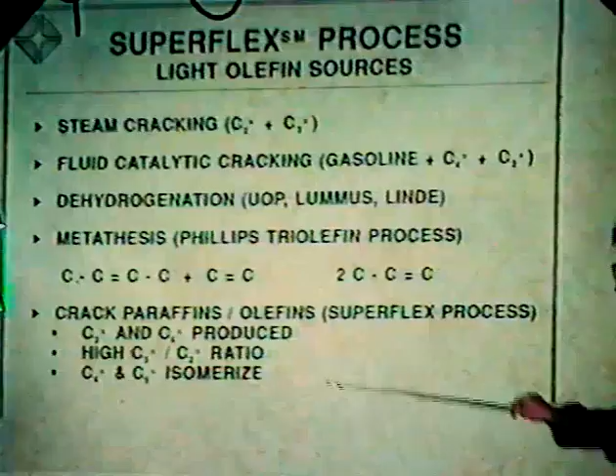What you'll be hearing about today is cracking of paraffins and olefins and mixtures thereof, which we've given the trademark Superflex. This work actually favors propylene and butylenes, and you get a very high ratio of propylene with respect to ethylene. As I mentioned earlier, you're able to skeletally isomerize the normal olefins to the branched form to make TAME and MTBE.

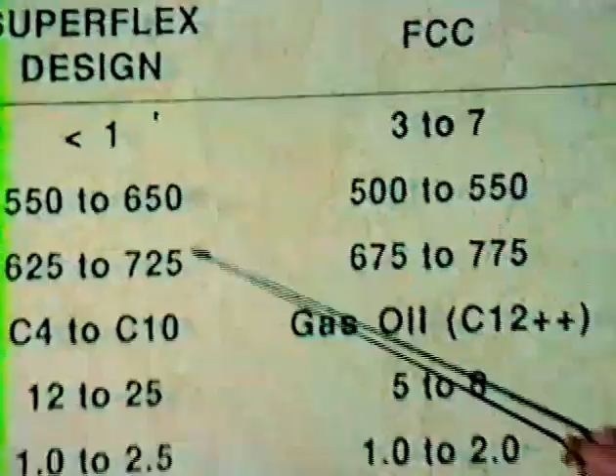From a scale-up point of view, it's simplified because it's very analogous to FCC technology, which is really to our advantage. In a comparison of Superflex versus FCC, we form very little coke, typically less than 1%. Our temperatures are a little bit higher in the riser, but regeneration temperatures are nearly equivalent.

Our feed is lighter - we're looking at C4s to C10s, whereas here generally your C12 is higher - and we're at a higher or lower cat-to-oil weight ratio. But if you do it on a mole basis, they're fairly comparable, and it has a competitive catalyst makeup rate. So things were looking fairly good from a scale-up point of view.

So what are the advantages of our technology? Well, it's an alternate route, obviously, to the light olefins. Another nice thing is you can integrate it into an olefins plant or a refinery, and that's, from an economic standpoint, the best way to do this.

Recently, Chem Systems did an economic review of the Superflex process, published in October, and they gave it very favorable ratings on an economic basis. You're able to upgrade low-value streams to light olefins, getting primarily your C3s and C4s at that high ratio I mentioned. You can get your isobutylenes and isoolefins, and the capital cost is quite low. So in order to implement this, it would be a relatively easy process in terms of putting it into a refinery or an olefins plant.

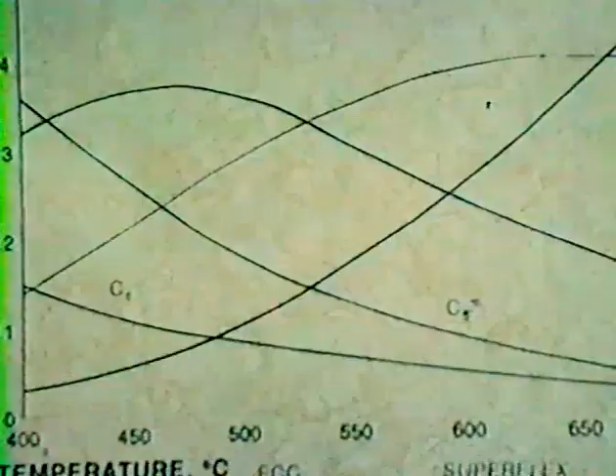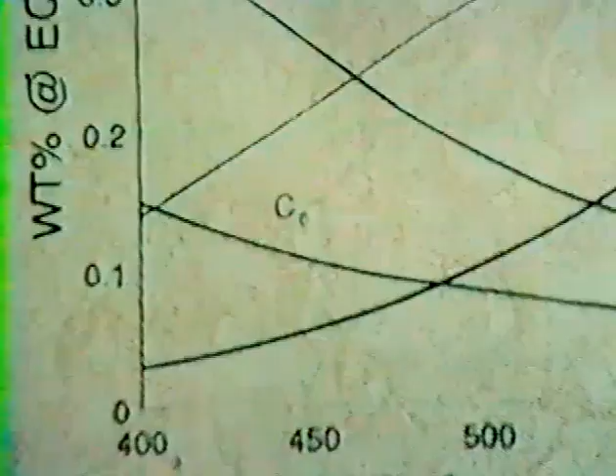As far as the thermodynamics, if you look at the olefin equilibrium for C2 to C6 with respect to temperature, steam cracking is generally around 750, favoring ethylene versus propylene. Whereas our technology operates around 600, so at equilibrium you're favoring propylene versus ethylene. Then the FCC technology we talked about earlier gives a higher product slate towards heavier materials. So it's a nice niche for us in terms of thermodynamics, taking advantage of that window to favor propylene.

As far as what we need to achieve commercial catalyst requirements: we had to have sufficient activity, obviously, and we wanted to run it in a fluid bed reactor, so we had to reach equilibrium quickly, in a matter of seconds. And of course we wanted to minimize what we didn't want to make - aromatics and paraffins. Since it was a fluid unit, we kept our attrition quite low. Our target was less than 15, but a lot of our catalysts were much lower than that.

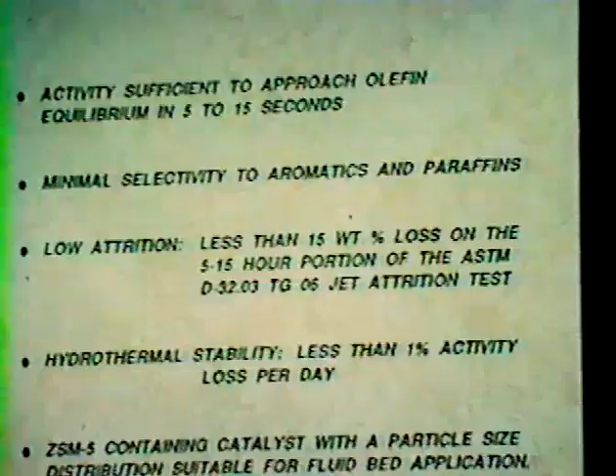Hydrothermal stability was important because you're burning off a little bit of coke, and as you'll see later, the process works a lot better if you have steam present. So we were very aware of that problem, and ZSM5 turned out to be the best component for our catalyst. We also had to be able to produce the final version of the catalyst in a suitable form - spray dried form with appropriate particle size.

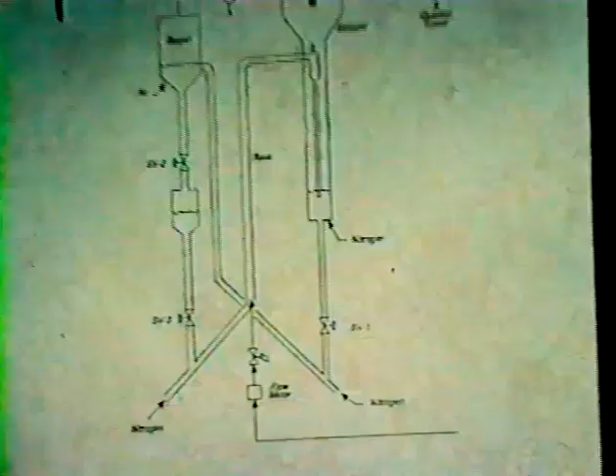As a simple idea of the catalyst working environment, this is representative of our pilot unit. Most of the chemistry operates in the riser, and the riser temperatures were 550 to 650 degrees centigrade, with very short residence times, 2 to 6 seconds. You can put steam in there, or minimize it - the amount of steam is very variable. Then the catalyst and products go to a stripper, the catalyst comes back down and over to the regenerator to be regenerated, and the products are separated out in the quench tower. So basically all your temperatures run around 550 to 650 degrees centigrade, and the stripper and regenerator do have steam up to significant amounts, roughly 5 to 50%.

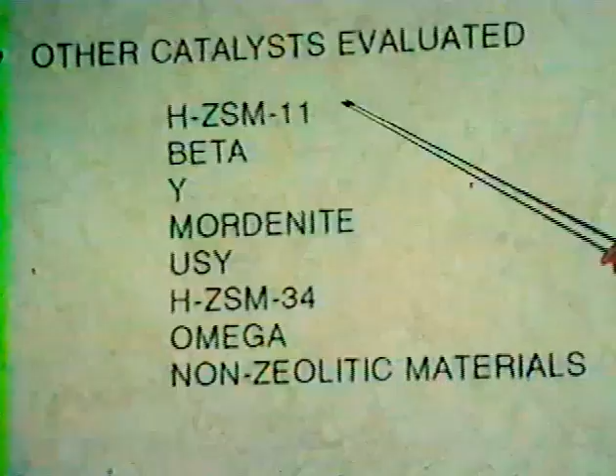In the very beginning of the project, we were looking for catalytic materials, and we focused on various zeolitic materials. We found ZSM5 to really be the best in terms of activity and selectivity. Other things we looked at were ZSM11, beta, Y, mordenite, USY, ZSM34, omega, and we even looked at non-zeolitic materials.

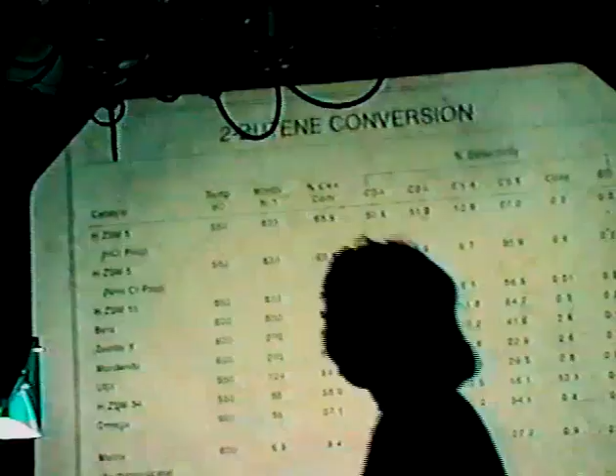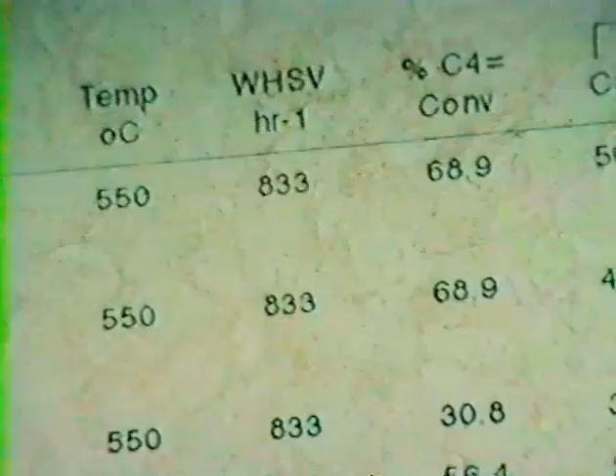A little hard to read, but basically the two top data are two different ZSM5 preps - very similar, you get very similar data. You're at a weight hourly of 833, the highest in this chart, and as you work down the chart, your weight hourly falls off to 7 and 4. So you see a decrease in activity as you change your zeolitic material. The last two are actually non-zeolitic - this entry is a matrix used to formulate the catalyst, and at a weight hourly of 7, you're only getting 9% conversion. That gives you an idea of the spectrum of activity obtained with various materials. The best selectivity was with ZSM5, and nothing really compared to it, so we focused a lot of our attention there.

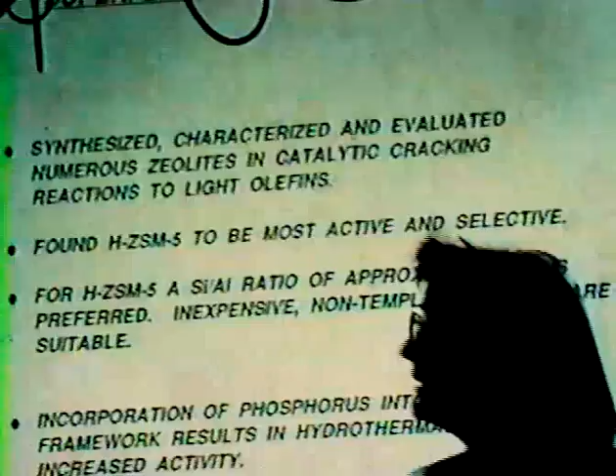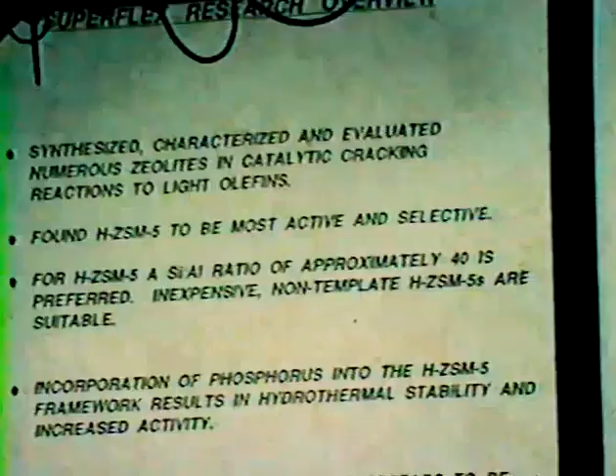So initially we did synthesize, characterize, and evaluate many materials, but ZSM5 was the one in terms of activity and selectivity. There was some work looking at different silica-alumina ratios, and the best compromise appeared to be around a ratio of 40. We found we didn't need a very specific crystallite size, and it didn't even have to be an expensive template prep. You could incorporate phosphorus into the ZSM5, and we found this brought nice properties of hydrothermal stability and increased activity, which solved a lot of problems for us. We looked at many different phosphorus loading levels and ways of incorporating it, and really you don't need too much to optimize its properties. Addition of steam into the feed actually enhances all these results.

As far as what we think the mechanism might be, if we're running with butenes, we think it's a simple bimolecular reaction, so that you initially couple and form a C8 olefin, and that will disproportionate by various routes to give you C3, C2, C5, or another route could give you aromatics.

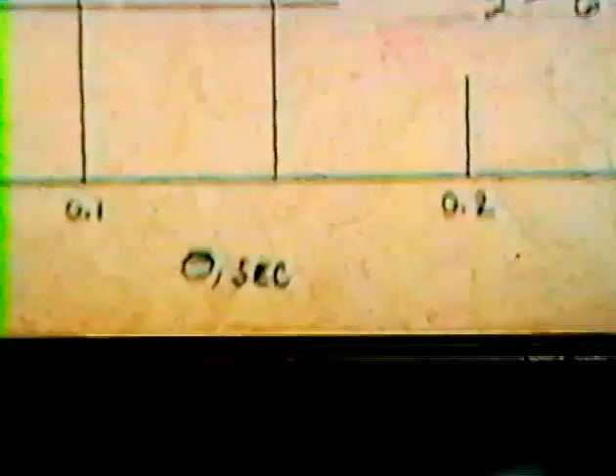Some early data was generated by one of our research people. From that, you can actually get somewhat of a second-order plot. You're looking at various contact times, and this expression comes from a second-order rate law, which I'll show you. It seems to obey that rate law fairly well. Out here, the contact time is so long you're really at equilibrium, so we're not really considering this data point. And this is with a ZSM5 catalyst.

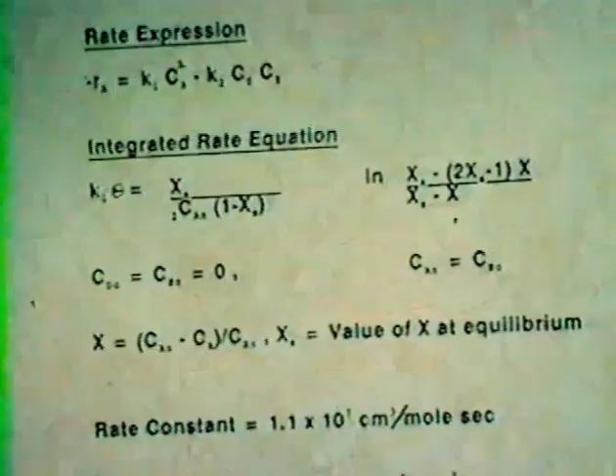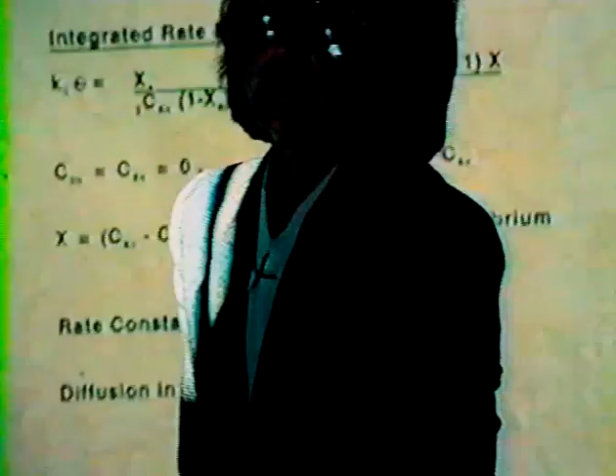We were interested in where the catalysis is occurring. Is it occurring on the surface and at the pore mouth? Or is there some diffusion into the pore channels, and is it occurring within the structure? Some data in the literature indicates that diffusion into ZSM5 at these temperatures, with molecules of this size, is extremely low, much less than 1 square centimeter per second. So we're looking at two different regimes, and we felt fairly confident most of the catalysis was at the surface and the pore mouth.

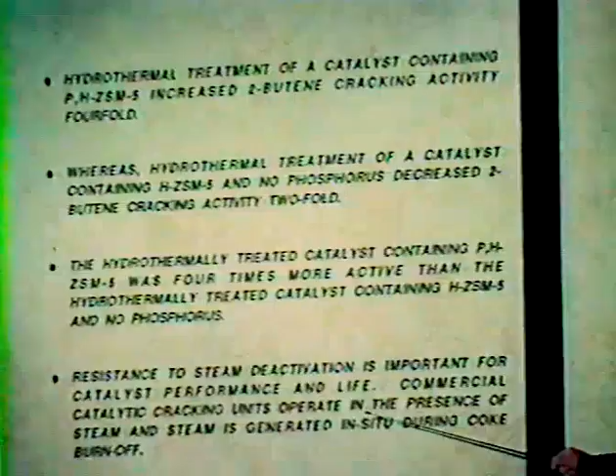As far as phosphorus and steam and what effect that may have: if you put phosphorus on a ZSM5 catalyst and then hydrothermally treat it, your activity goes up fourfold. Whereas if you don't put any phosphorus on the ZSM5 and then steam it, your activity decreases twofold. So there's definitely an advantage there. And you can't avoid the presence of steam because you will have it present in the regenerator, the stripper, and during removal of coke.

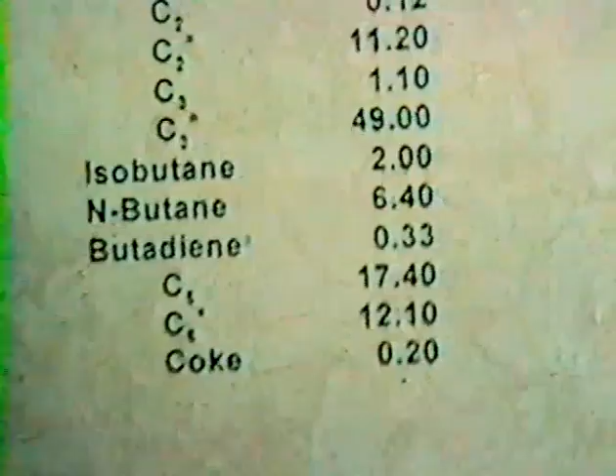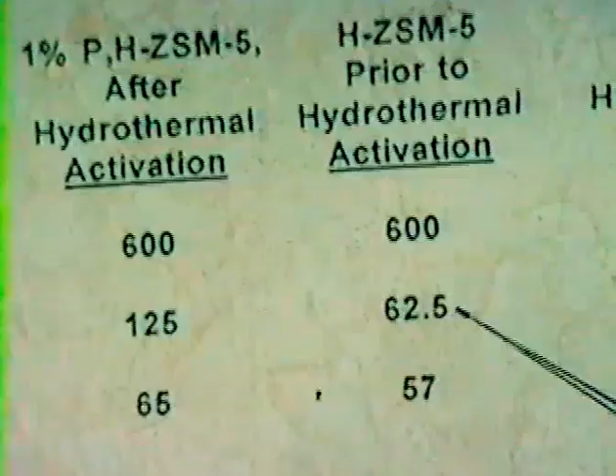As far as the data here, we're looking at pretty much what was just mentioned, with phosphorus prior to steaming, then after steaming. So your weight hourly is going up by a factor of 4, from 31 to 125. Here you have the straight ZSM5 with no phosphorus, and after hydrothermal activation, so-called activation, to get the same conversion you actually decrease your weight hourly in half.

As far as conversion over this phosphorus-modified ZSM5, this is what we focused on. It was working well. We looked at butene, normal octane, and that Udex raffinate I mentioned earlier. This bar graph shows the conversion, so you can see that the lighter butenes crack more readily. You're at a much higher weight hourly of 125, and you're achieving conversions above 60. Whereas the other feeds are much more difficult to convert. But in doing so, you can see the selectivity in all cases favors the lighter olefins, primarily propylene, ethylene, and butylene, and some C5 olefins. Very little coke.

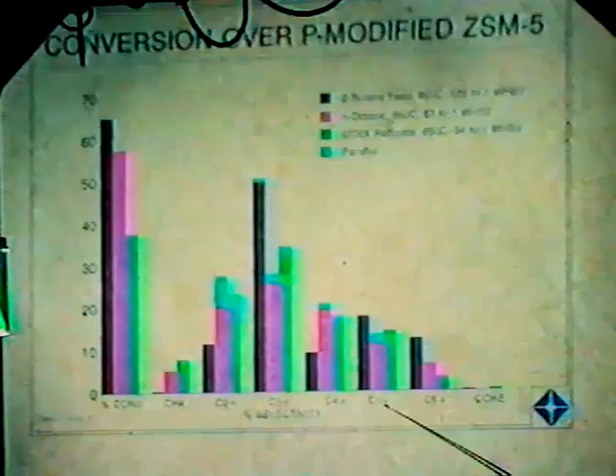So just to reiterate, we thought we had a commercially viable catalyst. It had good activity, increased with steam. We found out that to maintain high activity, it's good to expose the catalyst to steam as you're running, either continuously or intermittently. And prior to getting the catalyst on stream, we found that you had to do a severe steam activation step, and you'll be seeing data to that effect.

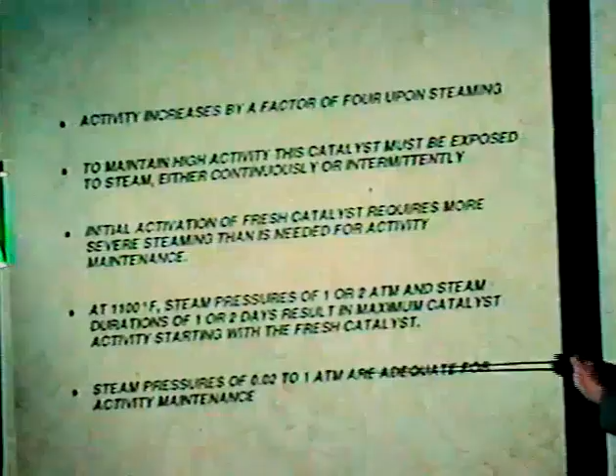That steam activation step is rather rigorous, so we thought 1100 degrees Fahrenheit, 1 to 2 atmospheres, for 1 or 2 days. But after that, once you're running your process, all you need to do is add about 0.02 to 1 atmosphere into your system to maintain that activity.

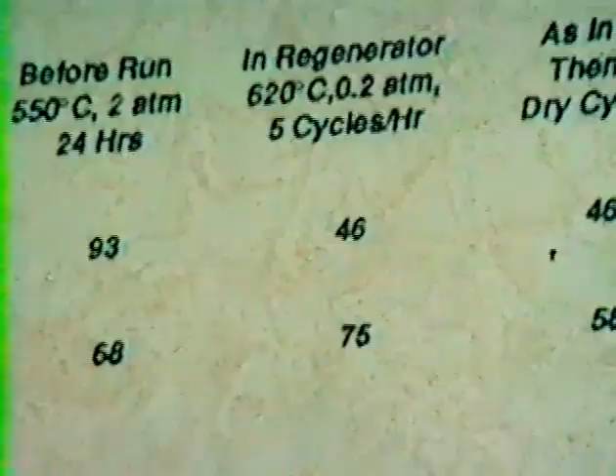This data came from our pilot plant unit using 2-butene feed. With a fresh catalyst, no steam activation, your conversion is quite low, 25% at a weight hourly of 46. But upon steam activation, you'll see your activity goes up to 68%, and you're at a higher weight hourly. Some of the better data occurs when you're running with steam in with your feed at some of the higher pressures, where you're at a weight hourly of 139, 65% conversion.

We tried to understand something about the ZSM5, and the starting point was to do magic angle spinning NMR, silicon and aluminum. Here we found that silicon is in a highly siliceous environment, very typical of ZSM5. Whereas aluminum initially is tetrahedrally coordinated, no big surprise there, and then of course when you steam it, it's dealuminizing. So we saw very much the typical signals where the aluminum takes on an octahedral environment.

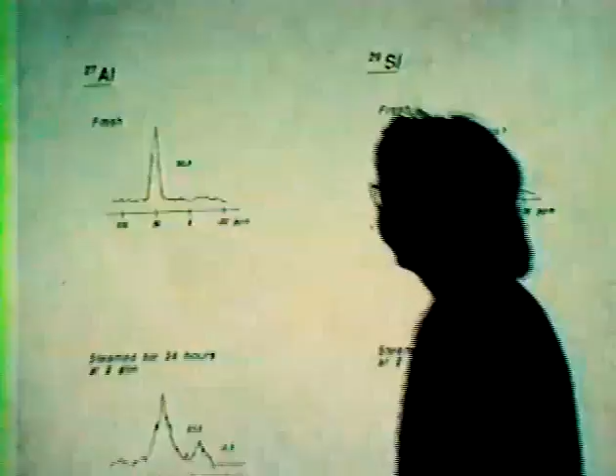Here, this is prior to steaming, and there you have your tetrahedrally coordinated aluminum. After steaming, we see some octahedral aluminum signal for that.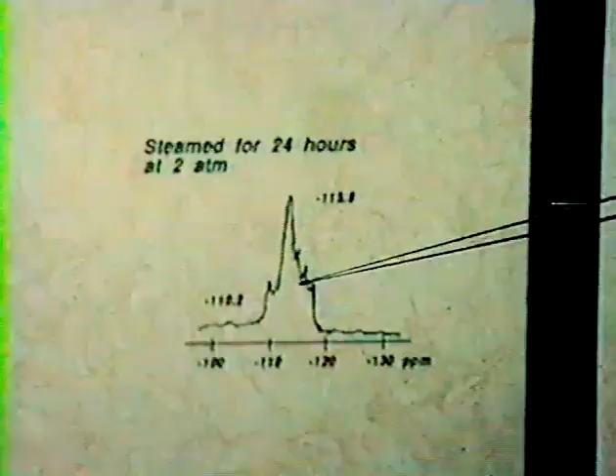Silicon, you have a very typical signal for ZSM5. And with steaming, you start getting the fine structure because you're pulling the aluminum out of the framework, and you don't have the quadrupolar influence on the silicon, so it sharpens up.

Okay, well, what happens when you put phosphorus into the ZSM5? First I should tell you the way we introduce phosphorus. We have the ZSM5 initially, and then we do a simple impregnation of phosphoric acid onto the catalyst and calcine it. So the data indicates or suggests that phosphorus binds to the framework.

It doesn't really become incorporated into it. And also we see some dealumination occurring. And when we severely steam it, the phosphorus appears to remain bonded to the framework through the oxygen-silicon bond, and even further dealumination is evident.

Silicon remains where it is, similar to what you've seen previously. But once you undergo the steaming program, it appears the catalyst doesn't change with time, so you don't really see any further dealumination. That's in line, I think, with the data that we're seeing.

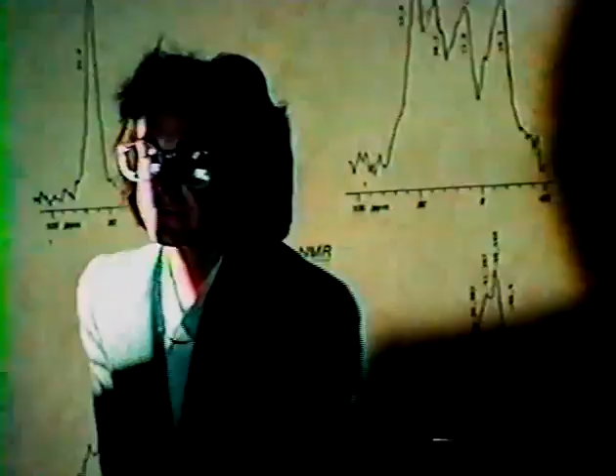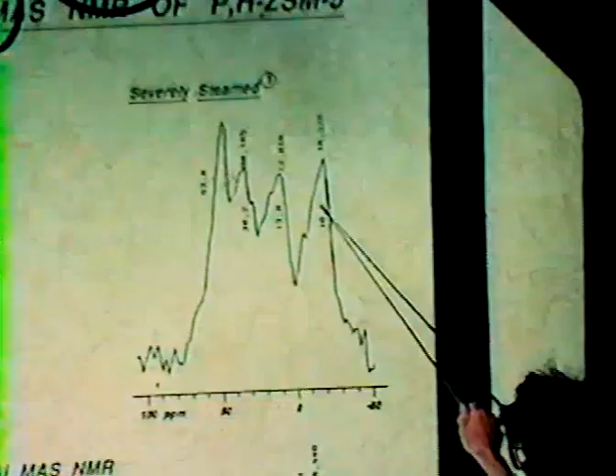So again, fresh, this is aluminum NMR, this is tetrahedral, octahedral. Then after severely steaming, you see more octahedral and some non-framework tetrahedral aluminum. So we can't deny that that's happening, but we think that after you severely steamed it, it's stabilizing.

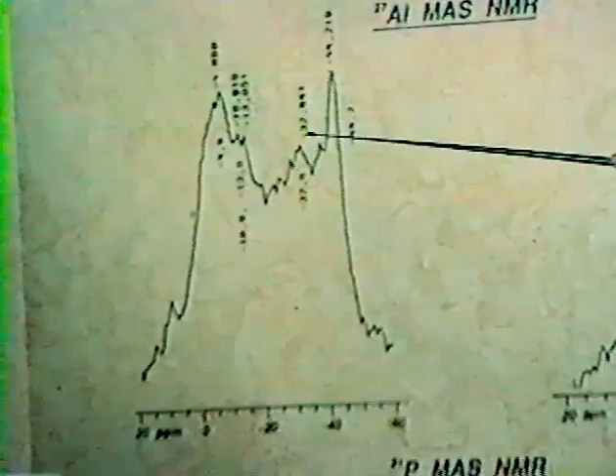The phosphorus NMR, here's the signal at negative 44 roughly, and that is indicative, we think, of phosphorus binding to the framework of the zeolite. This here, the signal at minus 32, is the aluminum phosphate that formed. Then you have the ortho and the pyrophosphoric acid.

With steaming, you remove the excess phosphorus from the zeolite, so the signal for the ortho and the pyrophosphate go down, but the aluminum phosphate remains, and also the phosphorus binding to the zeolite remains.

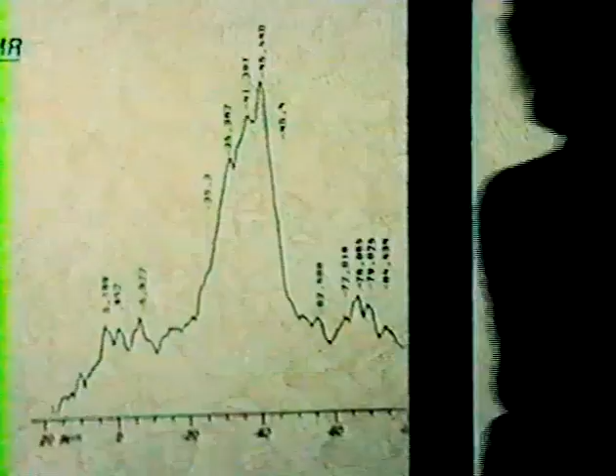Well, we really don't know what the mechanism is, but reading the literature over, this has been known for at least, I would say, 17 years. Really, the chemists and scientists at Mobil were the first ones to find the importance of phosphorus in ZSM5 and adding hydrothermal stability.

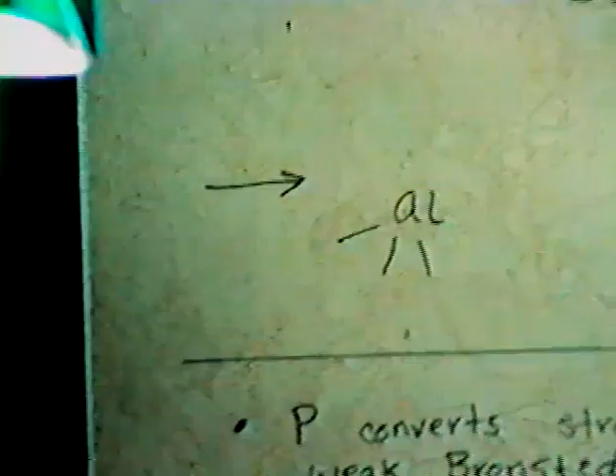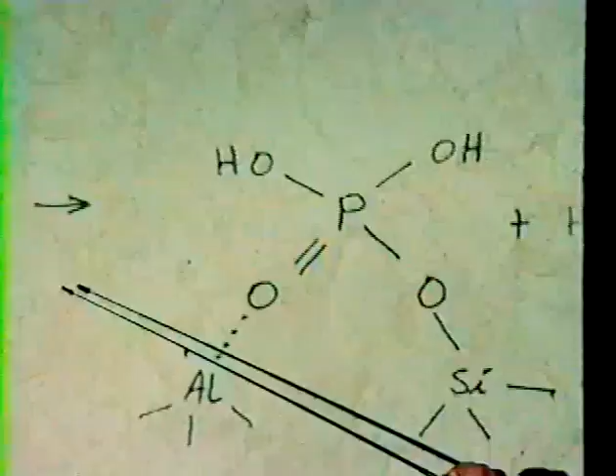And then there were a lot of papers in the literature, and it seems the consistent proposal that they're showing is perhaps the one shown here, and the trend in all the papers that I've read is they're saying that the phosphorus converts strong Bronsted acid sites into weak ones, and a mechanism similar to this one may be occurring where it's interacting with a Bronsted acid site.

You're eliminating water here, and it can go even a step further to eliminate a second molecule of water. And this would account for dealumination perhaps, and also allow for the ability to form aluminum phosphate.

Also, we notice that some of the data you see later on, it appears that the phosphorus is changing the pore size and also making the path of hydrocarbons more tortuous. So it's actually taking up volume within the pores.

So we ran a series of constraint index experiments, and the data suggests that phosphorus may be blocking the channels, and that most of the catalysis that we're doing could be occurring at the surface in the pore mouth. There's been some work done in the literature. It's been reported that by high-resolution electron microscopy, this data also suggests similar findings.

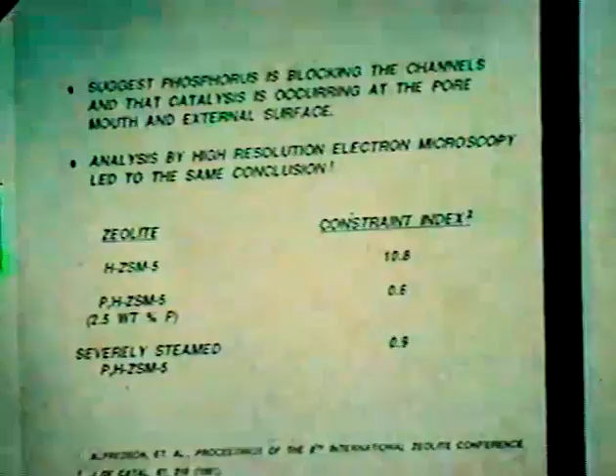So normally ZSM5 would have an index code around 10 or greater than 10. And generally, zeolites that have an index less than 2 are wide pore mouth, and they don't discriminate between a linear versus branched hydrocarbon. And that's pretty much the type of data that we're getting here. So that's why we reached the earlier conclusion I stated.

But we still wanted to do a little bit more mechanistic work, so we prepared a modified sodium ZSM5, where the external sites are protonated and the internal sites were cationic.

And then we carried out coking studies with this modified zeolite versus ZSM5, and we characterized the coke on these materials by xenon NMR. We found that the modified zeolite—and we also use these zeolites in various catalysis reactions, cracking and methanol conversion.

Again, we were using this as a mechanistic tool to understand our Superflex project a little better.

As far as making the modified zeolite, you take the sodium ZSM5 that you synthesize, and then you treat it with a very sterically hindered amine so that you're protonating externally and at the pore mouth and very little on the internal sites. We use very highly hindered salts, examples being the tri-N-butyl, C4, C5 branched amine salts.

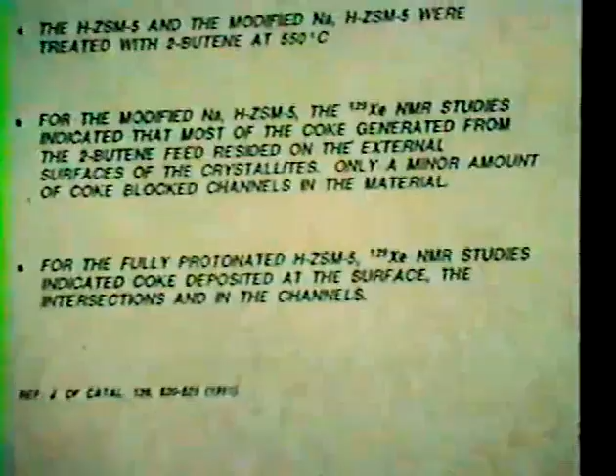From our coking studies, we would generate different weight percent of coke and then do the xenon NMR work. Basically what we're seeing by the NMR studies is that coke pretty much was on the external surfaces. Xenon's a good probe molecule because it can tell you where the coke is and how it's closing off the pore mouth and how much is being formed inside the channel.

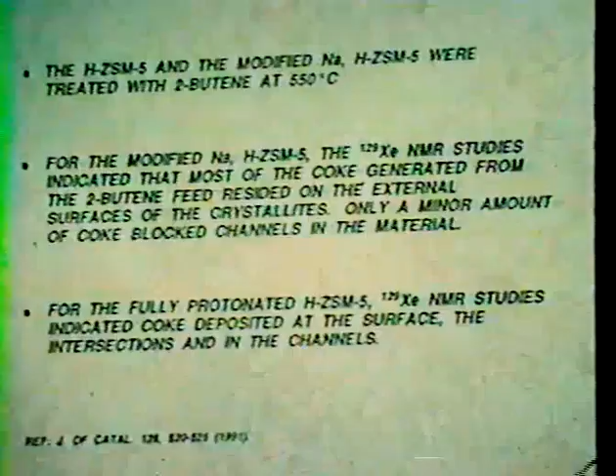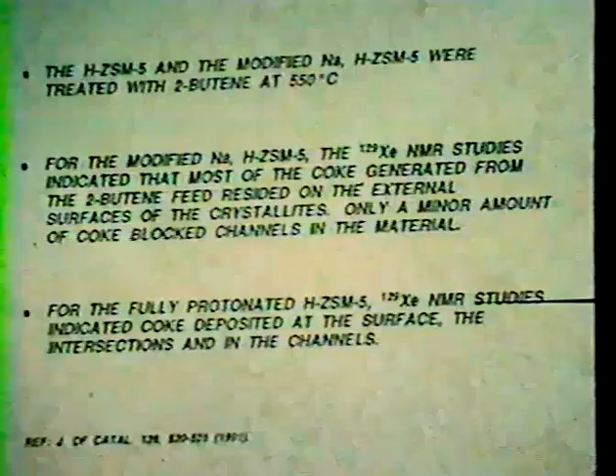So basically we knew we had prepared a material that would be helpful for determining diffusion limited reactivity, whereas the protonated version of ZSM5 coke was definitely throughout both the surface, the intersections, and the channels.

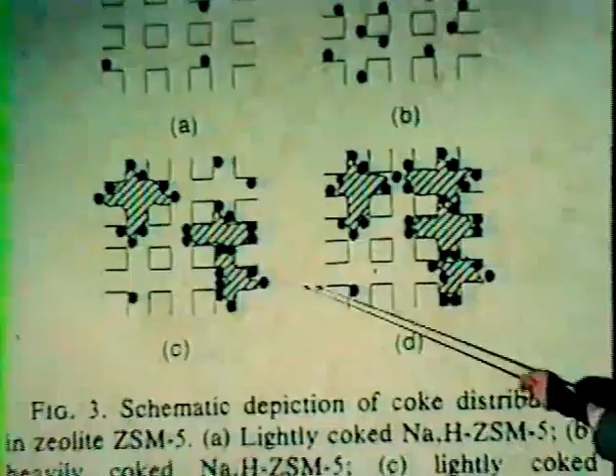I don't really have all the data to show you this. We did publish this in the Journal of Catalysis, so I can give you that reference later. But this is just a model here - a modified version, lightly coked versus severely coked, whereas here you have a normal ZSM5, lightly coked and highly coked. Very simplistic drawing.

As far as the catalytic activity and methanol conversion, the protonated version appeared to be much more active than the sodium version, because under those conditions you are really utilizing the internal catalytic sites.

Whereas now we're looking back at the Superflex reactions with 2-butene and octane as the models, we're at such high space velocities that really we saw very similar catalytic activity, because we aren't utilizing all the activity inside the pores.

Just to show you the 2-butene conversion, protonated versus modified, similar conditions - your conversions are nearly equivalent, and your selectivities are fairly similar.

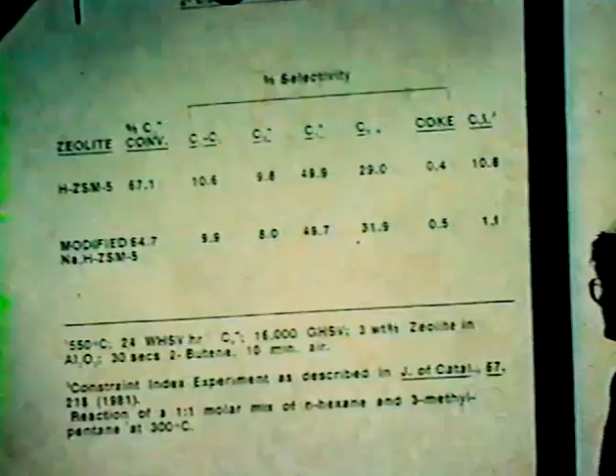And then we did a constraint index experiment on the modified ZSM5 and obtained a low number. This is in line with the experiment you saw earlier, where really you're not discriminating between linear and branched feeds.

And to show you the paraffin cracking, this is for normal octane. Again, at the same conditions, you have nearly equivalent conversions for both the modified versus protonated zeolite.

So it seems rather fascinating that here we are using a ZSM5, yet really we're only using the surface and the pore mouth, and there aren't really any examples out there in the open literature or patent literature where people have used ZSM5 this way.

I'll skip over the methanol conversion, but basically you're seeing half the activity in methanol conversion for the sodium modified.

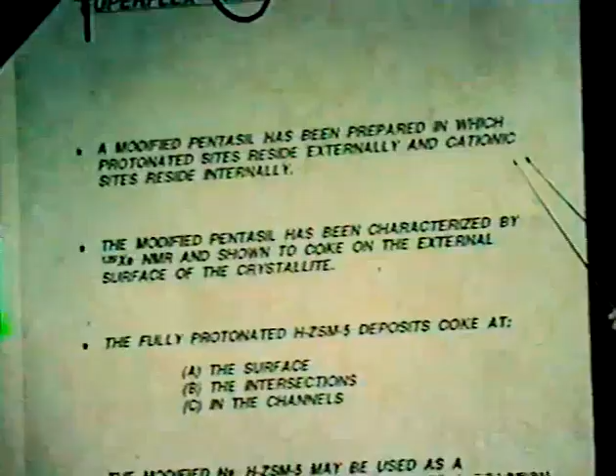So what are our mechanistic conclusions? Well, we feel that our modified zeolite was prepared the way we wanted it to be. In other words, we had activity protonation externally and cations were internal. This was borne out by our coking study with xenon and NMR.

Whereas the HZSM5 version, we're definitely depositing coke on the surface, intersections, and channels - those are the sites that are being used. It appeared to be a successful mechanistic tool in our case to get a better handle on the reactivity in Superflex, and that really we're looking at a reaction that's diffusion limited.

In order to do the Superflex chemistry, we run at very high space velocities and very high temperatures. And again, we're going into a niche where I think a lot of people in industry and academia really haven't utilized - it's very good in terms of making light olefins by running under these conditions.

As some of the data that you've seen already shows, we feel that we're running under diffusional limiting conditions, and that the majority of the chemistry is occurring at the pore mouth and surface - that's where the catalytic sites are for our reactions. Adding phosphorus to the ZSM5 does give us the hydrothermal stability that we need, and as I mentioned, with steam activation you get higher catalytic activity.

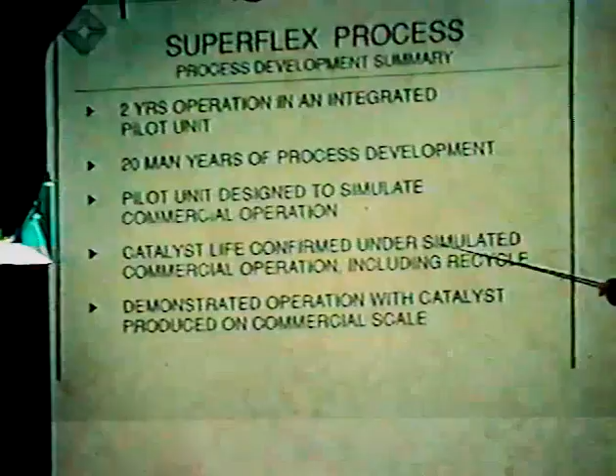Well, we did a lot of work here in 2 years' time. We ran a pilot unit here. It was a significant effort in our research R&D group. We felt that we pretty much simulated commercial operations, confirmed catalyst life, and we were able to prove that you could recycle your materials, which is important. And it demonstrated operation with catalysts produced on a commercial scale.

So we had pretty much a process that was proven out in development with many different feedstocks. We had a catalyst that was scaled up and could be easily commercial. And actually right now this technology rests with our licensing department, and we're trying to find a fit for a company who would be interested in making cheap propylene and butylenes. Because that truly isn't our business. We're more interested in propylene oxide.

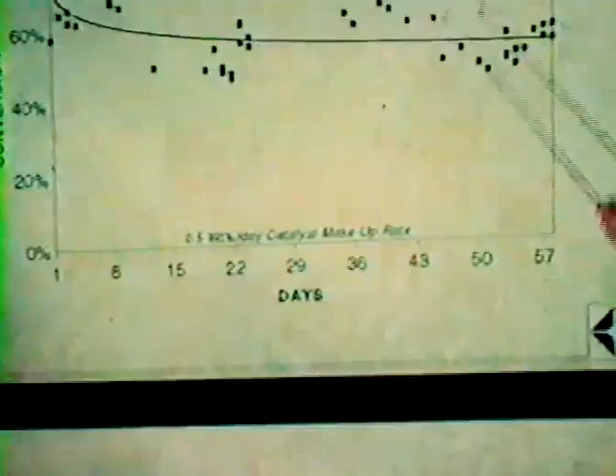As far as the Superflex catalyst life, as I mentioned, we did run out here shown 60 days, and it appears to be leveling out around 60% conversion, and the makeup rate is 0.5% per day. So the engineers were fairly happy with those results.

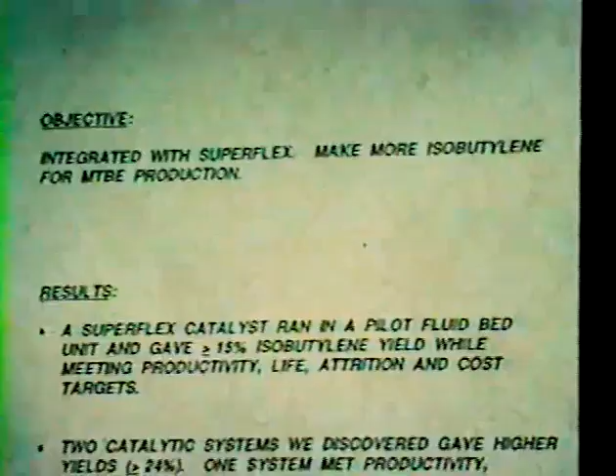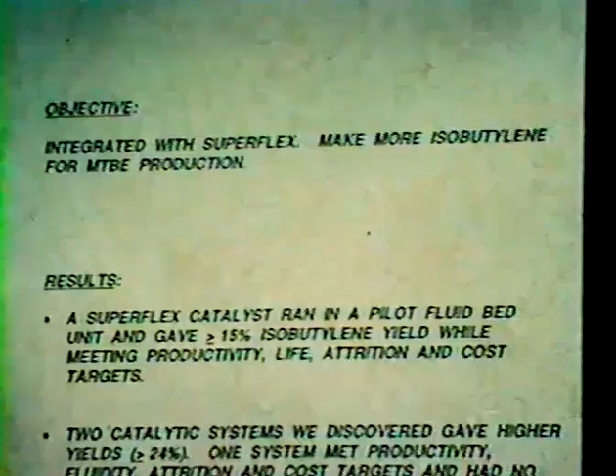Okay, once you get your Superflex going, you're going to get a lot of butylenes, and the butylenes are under equilibrium distribution, but it would be nice to take advantage of all the butylenes and try to optimize your isobutylene yield. Our objective was to integrate it with Superflex, so we'd have one unit doing so-called Superflex, another unit that could do skeletal isomerization, and that would allow you to make more MTBE.

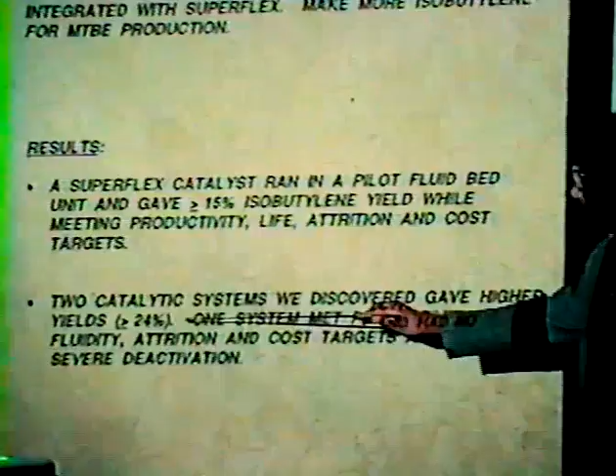So we worked rigorously here, and we ran the pilot unit, and we were able to get yields of 15% or greater, meeting all the other criterion that you need in order to commercialize this. And this was with a Superflex catalyst, so we could do 2 different types of chemistry, the catalytic cracking plus the skeletal isomerization. But at the same time, we discovered 2 other catalyst systems, and they gave you higher yields, 24% or higher, and again met many of the targets that you're looking for. One came very close, another one we're still working on.

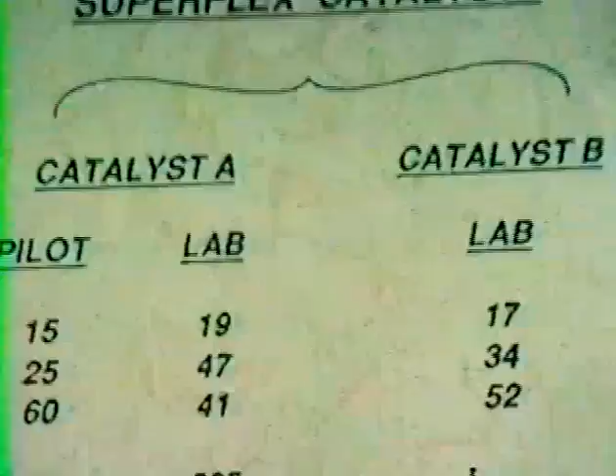But just to give you some idea what skeletal isom data looks like, we have 2 Superflex catalysts shown here. The one that ran in the pilot unit, we're getting 15% yield. In the lab, we're getting a little bit higher yield, 19%. So we spent a lot of time trying to figure out why it is we get higher yield in one reactor versus the other, and you'll be seeing data to help explain that.

But overall, things look good. I mean, the yield's good, it's fluid, attrition's low, it's less than that 15% target that I mentioned. You're at a very high weight hourly. Here showing data at 250. And actually, this other catalyst B was even higher, at about 700.

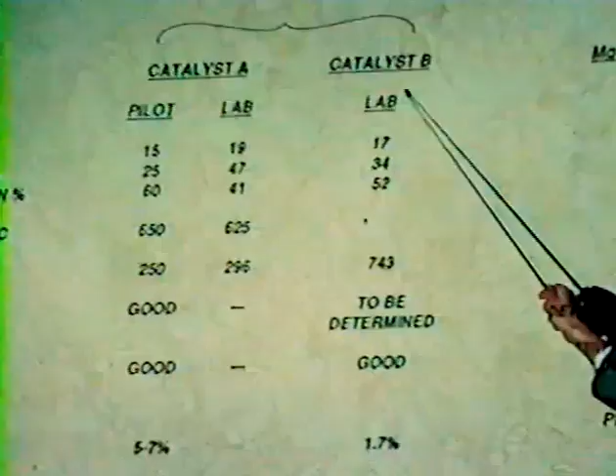Then another interesting finding, which is totally offline with ZSM5. These are all ZSM5-based material. So this one is a different zeolite. It's MeAPSO-31. The composition of matter is patented by UOP, so they have that patent. But we were able to find a niche where they hadn't patented this process under these type of reaction schemes. And so this patent issued very recently to ARCO.

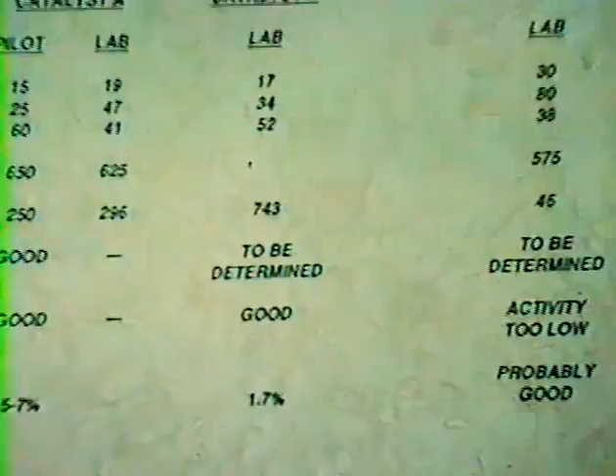But the thing is, it's very inactive. You're at a weight hourly of 45, so you really wouldn't be able to use it in a fluid bed reactor. You'd have to go to a fixed bed. So the activity is low. You don't really have to worry about attrition now, really. And we don't know the life. The life may be an issue, because there is some speculation that the effect of steam can have some negative impact on metal alumino phosphates. But it was interesting to find that.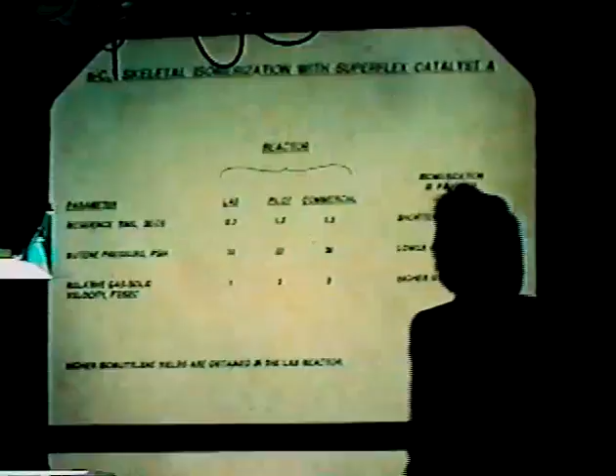Okay, so we tried to understand why it is the reactor in the lab works better than the one in the pilot unit in terms of generating yield of isobutylene. Here are factors shown here: residence time, pressure, and linear velocities. And they're listed in order of importance. And actually, isomerization is favored by shorter residence times. In our lab unit, it was shorter, 0.3 versus 1.3.

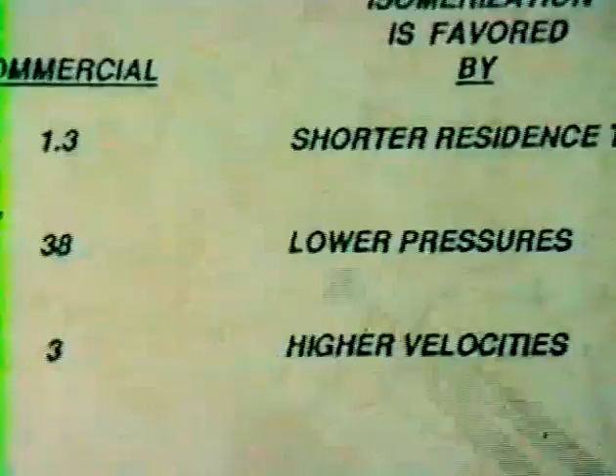And lower pressures favor this chemistry, and we were at a lower pressure. But it's true that higher velocities are favored by isomerization. And the pilot plant was higher, but as I mentioned, that's a less significant factor. So we thought we had explained some of these differences in our reactor system.

So higher temperature favors isomerization versus cracking. And I guess the rationale here seems kind of contrary to your reasoning, but we thought that cracking needs a longer surface time because it's a bimolecular process. Steam favors cracking - steam generates more Bronsted sites for cracking, whereas we felt that the Lewis acidity was more important for isom.

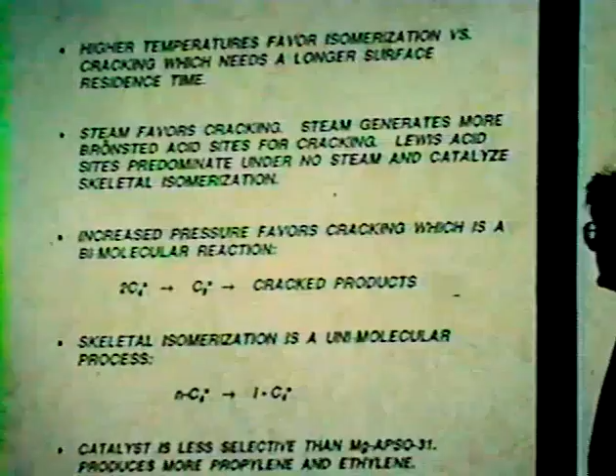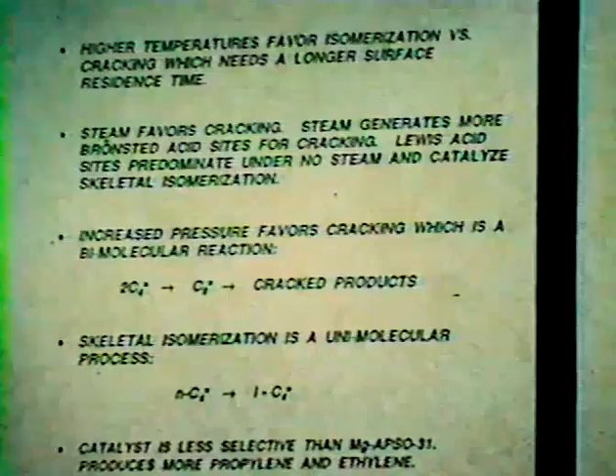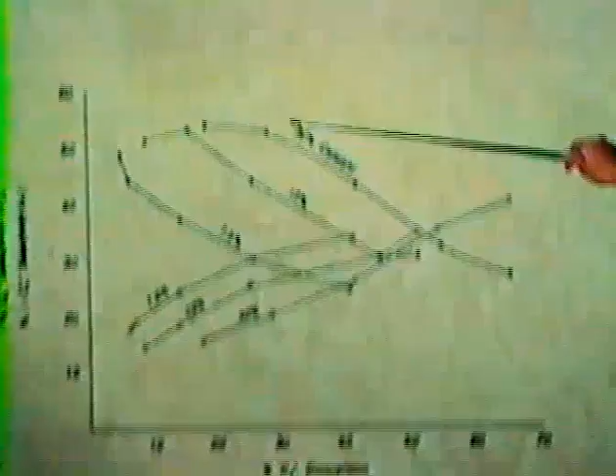Here's some interesting data showing the effect on velocity. We plotted conversion versus selectivity to isobutylene, the solid dots. We kept the catalyst weight constant in terms of volume but varied the amount of ZSM5 by adding a diluent, an inactive substance like alumina. As you add more zeolite, to keep conversion higher you have to run at a higher space velocity, and doing so favors more isobutylene while selectivity to propylene drops off, in line with the higher velocities mentioned earlier.

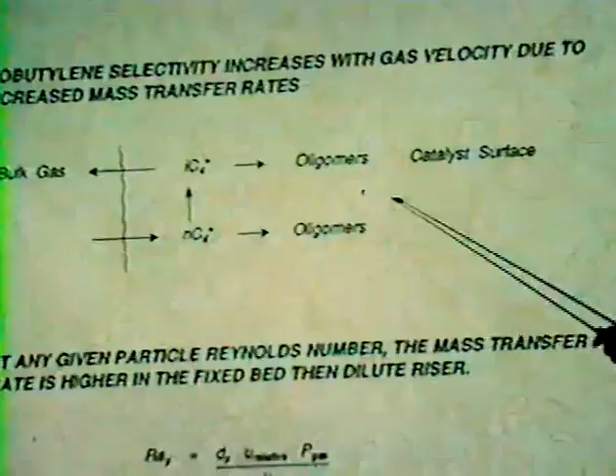Conceptually, isobutylene selectivity increases with gas velocity, and we feel it's a mass transfer phenomenon. You want the gas to diffuse onto the surface, undergo skeletal isomerization, and go back out, rather than oligomerize and undergo cracking. At a given particle Reynolds number, the mass transfer rate is higher in the fixed bed than the dilute riser. So we're trying to rationalize the differences in the data, which helped us understand the chemistry a little more.

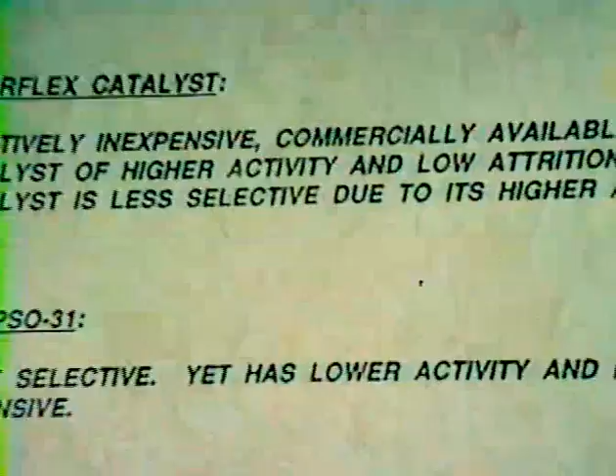As far as where we stand right now, we have a Superflex catalyst that can do skeletal isomerization. It's inexpensive, available, active, and has no attrition. If it has any drawback, it's too much acidity leading to cracking. The other catalyst you're seeing today is a metal APSO, and basically its problem is it's not active enough, plus it's much more expensive.

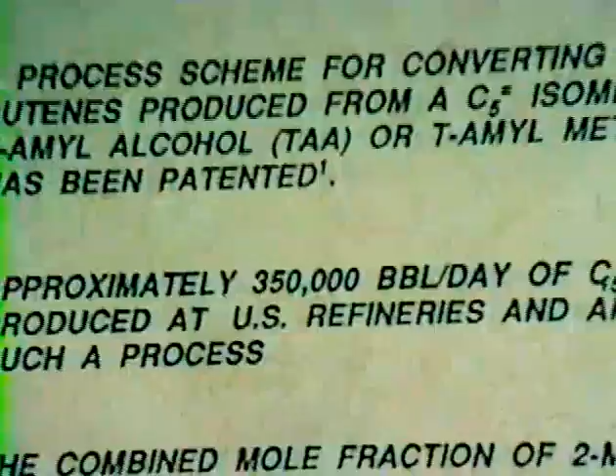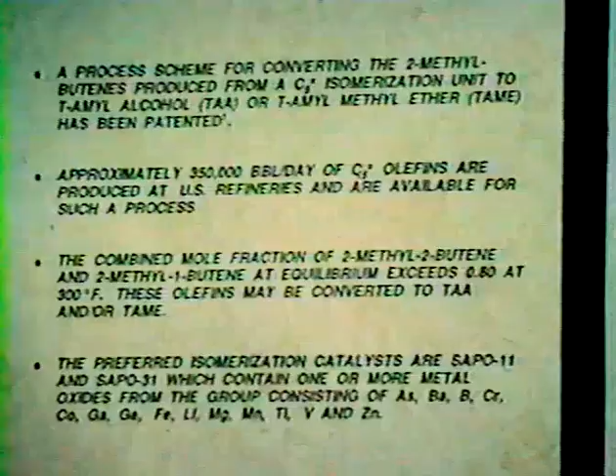The other niche is to do TAME. We did a little work here, though it would be good to go back and do more - I think there's a lot to contribute in this area. ARCO was able to get a process scheme for doing skeletal isom on the C5 olefins to get 2-methyl-butene and make TAME, or tertiary amyl alcohol, out of those. There's an awful lot of olefins in United States refineries we can take advantage of. If you look at the equilibrium data charts for the C5 olefins, the mole fraction exceeds 0.8 at 300 degrees F, which is a temperature where you might be able to do some catalysis. So it's really something to go after.

Our initial work focused on SAPO-11 and SAPO-31, substituting in and looking at various metals. Magnesium again shows promise, and iron and manganese could be interesting - there's a number of possibilities you can look at. And of course you can use the Superflex catalyst; it would work also.

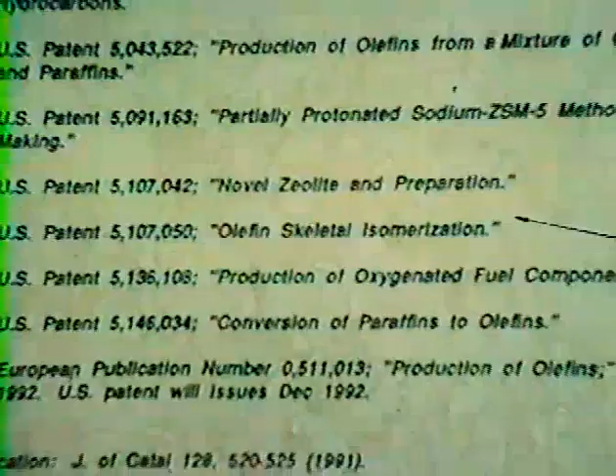So I'll end it there and handle questions if you have any. Thank you.